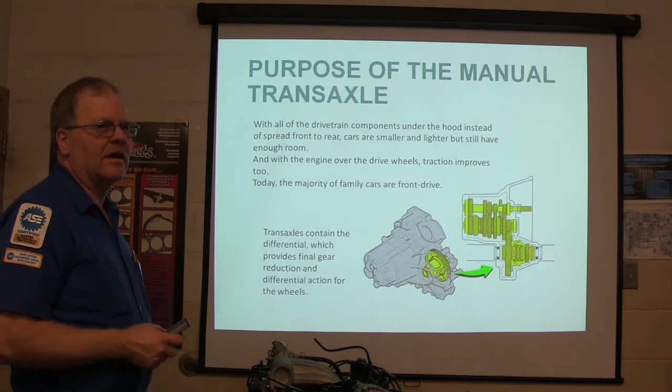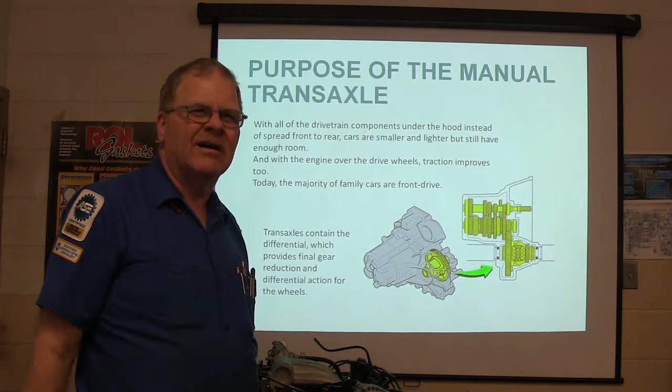You don't have to have a transmission tunnel if you've got front wheel drive, or if you've got everything in the back. If the engine's in the back or the transmission's in the front, you don't have to have a tunnel. Now most of them got a console anyway, but the majority of family cars are front wheel drive now.

They have the differential in them. We've been talking about that before. That's not really all that complicated.

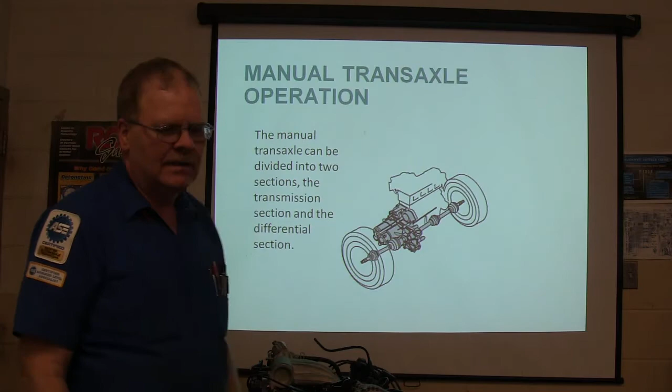Manual transaxle can be divided into two sections: you've got the transmission section, and then you've got the differential. That's why they call it a transaxle.

On the earlier front wheel drive ones, like Toronados and Eldorados that I used to work on, they actually had a little cast iron housing with the differential in it, and because the engine sat straight in those cars, not sideways, they had to do things a little differently. The Acura Vigor had the engine in straight, and the transmission looked like a regular transmission, except the output shaft, instead of going back to a drive shaft, came back out the front into a little differential assembly.

If you're ever taking one of those apart and putting it back in, you need to put a lot of grease around those splines where the transmission hooks into the differential, or it will wear out those splines. I've seen that happen.

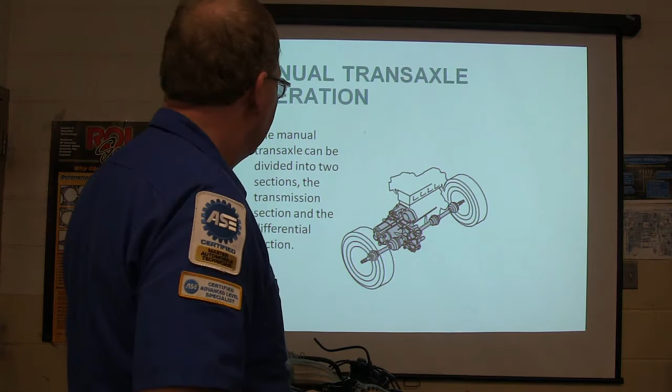The transmission section uses the same kind of components as a manual transmission - this is manual, not automatic. Shift fork, synchronizers, gears, basically the same design.

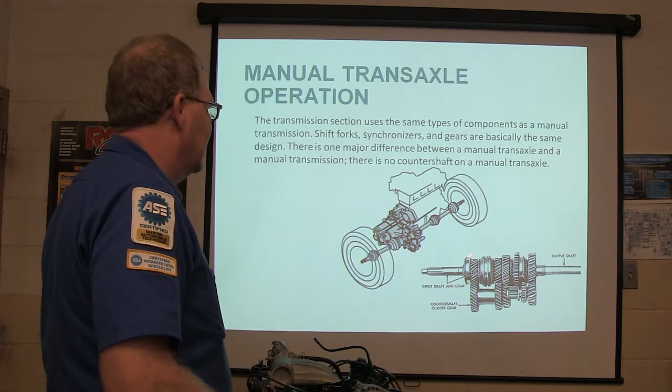There's one major difference: there's no counter shaft on a manual transaxle. This right here would be your standard, and then you've got a counter shaft down here on that other one. The counter shaft isn't necessary because rotation from the input shaft to the main shaft, called the output shaft, is transferred to the differential by way of the ring gear.

The ring gear is built right in here. Remember when I was talking about the automatic transmissions on the Toyota Camrys and stuff, you need to understand that - I don't know when that changed - but you need to make sure that if you're working on a 90s Toyota Camry, or even early 2000s, the differential part has a different oil chamber than the rest of the transmission.

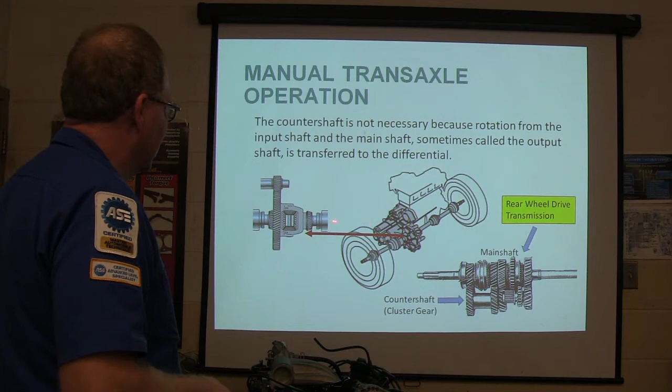If you don't check it, it could lock up going down the road, and that'd be nasty in traffic in Atlanta. Rear wheel drive transmissions like this have a main shaft and a counter shaft right there. This goes out to your CV axle, coming from the transmission itself. The differential is built in from the gears - this is the output of the manual transaxle, front wheel drive differential, going to your wheels.

And here's your rear wheel drive - it's set up going back here, and then it goes out to the wheels after it gets here.

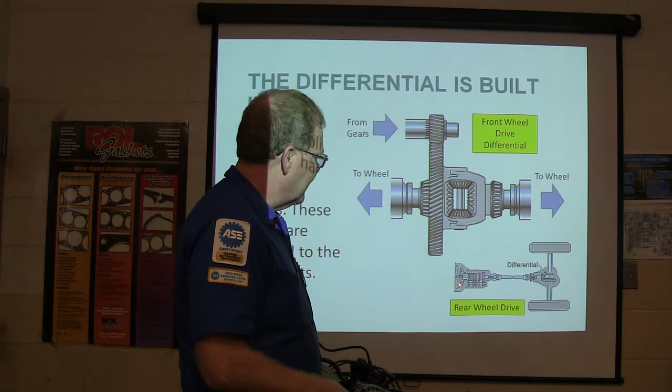They even have that drawn the right way. Looking at this, which way does this turn when you're going forward? If you're looking at the front of the engine, it turns clockwise, right? But if you're sitting in the car, it's turning counterclockwise because you're facing the other way.

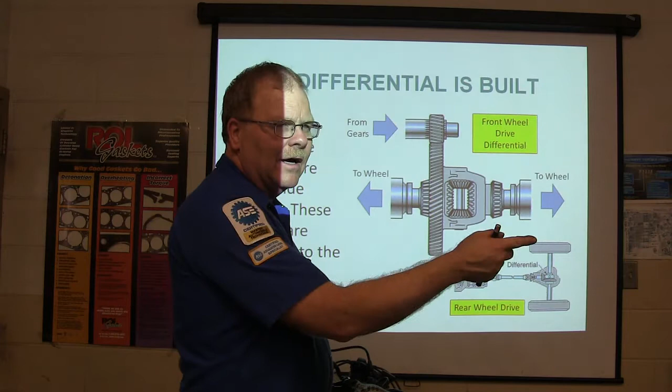That's what I'm always telling you guys about taking out brake caliper bolts - you got to turn the bolt the way you want it to go. If you want it to go away from you, you got to screw it away from you. But anyway, that's just a little aside.

The components that make up the differential are like this. We saw this a couple of days ago, didn't we? We didn't take them all the way apart, and that's what this right here is - that's a differential.

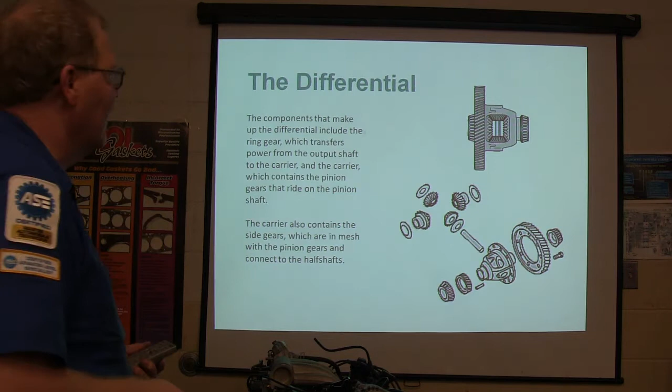I've held it up many a time. You can see that. And that actually came out of a front wheel drive. It's not very big. But you remember this right here, McBride, that pin that had to slide out so that we could push those axles in and take the C-clips off and get them out and all that? Well, on your front wheel drive, you got that little old spring ring that whenever you shove them in there, they click in. Then you got to pop them out, kind of like you had to pop them out on that car you're pulling the transmission out of.

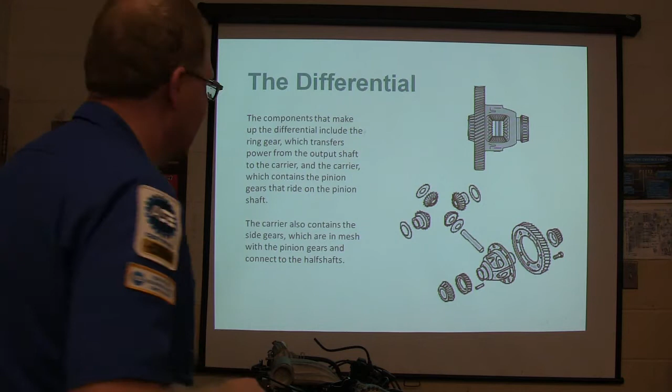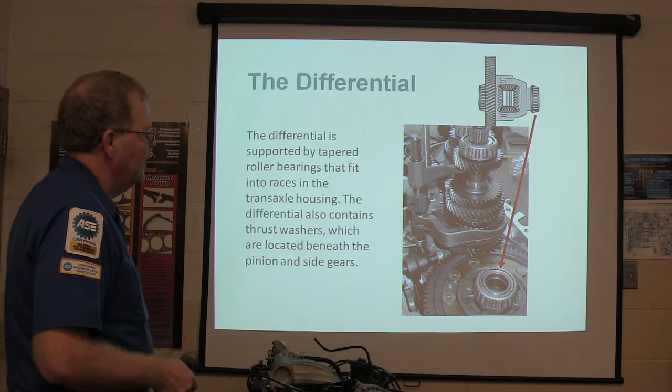The differential is supported by tapered roller bearings. That's what they look like. You've seen those before. Remember we packed some the other day on Gene's truck, right? The differential also has thrust washers that are located beneath the pinion and side gears. A lot of times, when you're putting these things back together, you're supposed to make sure that you get that preload right on those gears. And you would put shims between the center part of that bearing and that carrier to make it right. And there's a way you check it with depth micrometers and all that kind of stuff.

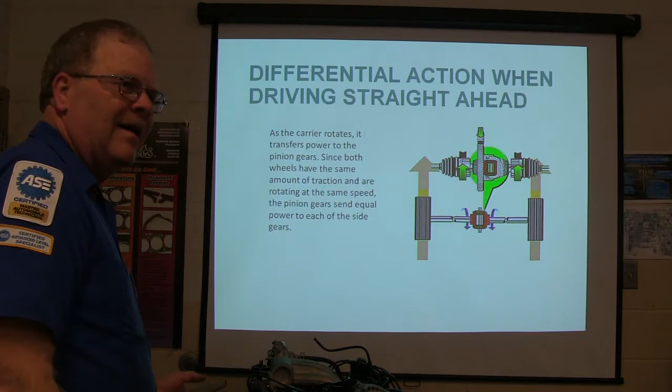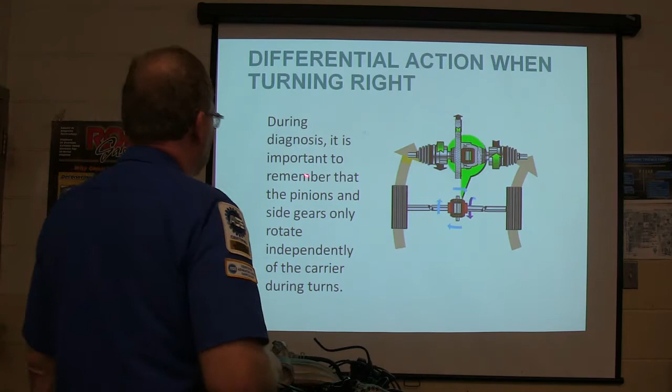Okay, differential action when driving straight ahead. They're just rolling. When you're driving straight ahead, it's just doing like this, and there's not any gear action at all. The gears don't start rolling against each other until you're turning, and that's the only time that happens. So one wheel can turn faster than the other? Yeah, that's right. That's necessary. Even those little remote control cars, if you tear the rear end apart on one of them, it's got those same kind of gears in it. It's really something. And during diagnosis, remember the pinion and the side gears rotate independently of the carrier during turns.

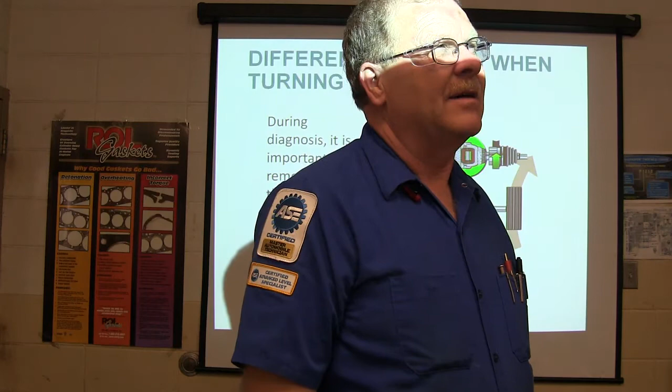One of the things I thought was peculiar about this rear wheel drive stuff is we had a Ford pickup in here, the 98 model, that had busted up the spider gears. We bought a set of spider gears, and it was $65 for a new set in those days. And they actually had positive traction. It had that spring in between the gears. It was a booger bear getting it in and out of there. But anyway, got all that done, built it back up. The oil cost almost as much as the gears because the oil was real expensive. But a Chevrolet, just like it, the gears cost $500 or $600. 10 times as much. And if you look at them, they don't look any different. I don't know how much they are for a Dodge. Cheaper.

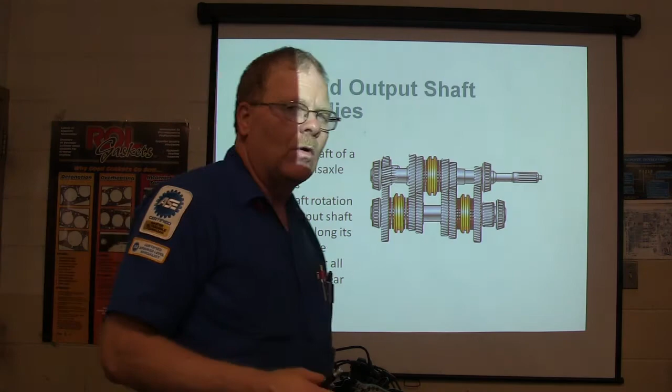Input and output shaft assemblies. The input shaft of a manual transaxle transfers crankshaft rotation. See, here's where your clutch goes. Now, most of the time, a transaxle won't have a pilot on the end. It'll just be sticking straight out there. Along its length, there's drive gears for all the different gear ratios. Now, you're going to notice that this synchronizer is on that shaft, and then you got two synchronizers on those two shafts. See that? They're not on the same shaft. This particular one here, because it's got fifth and reverse, has one back there behind the center housing. See them bearings? This type rides on the input shaft the same way the speed gears of a manual transmission ride on the output shaft.

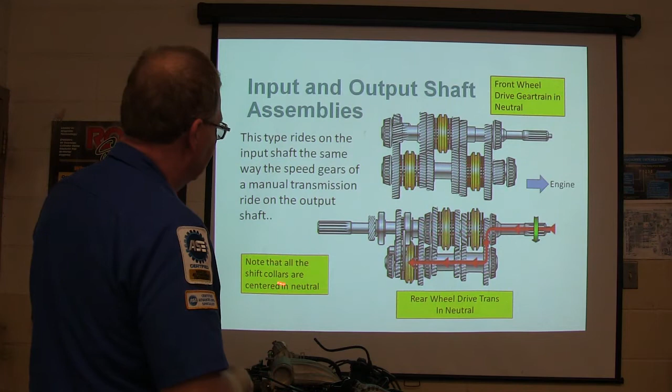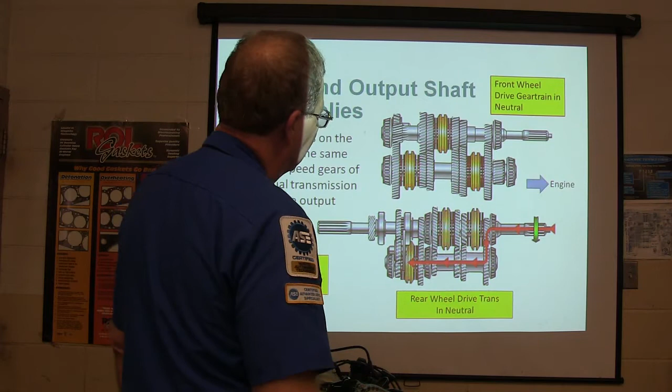All right, now, see this right here, your engine is here. This connects to the engine, not that. I put that arrow in a bad place. But we got all the shift collars centered in neutral right here, except that one. That's actually supposed to be in neutral. I don't think it is. Maybe it is. Hard to tell in a picture. But now this is in neutral, and that's in neutral. See how this is spinning all the time, but on this one here, you're just going straight through and nothing's being transmitted down this way, so everything's just sitting there.

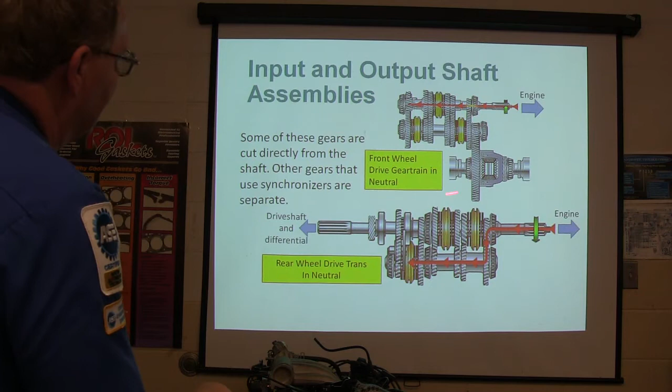All right, here's your input and output shaft assembly. Some of the gears are cut directly on the shaft. Others and the synchronizers are separate. Now, some of these gears, when you're taking it apart, you can just take a snap ring off and pull them off. Some of them will come off after you take other parts off. Some of them, you have to press off of there with a special tool. So it's just really different.

And Eddie was talking about some of those guys down there. And it's kind of like automatic transmissions up here. You know, I can get somebody started on an automatic transmission, and they'll tear it down, and then they'll start putting it back together. And if I don't actually set aside time for them to put it back together, they'll let it lay there and won't ever touch it again, if it's somebody that's not particularly dedicated. Of course, I know that you guys aren't that way, but I have had that.

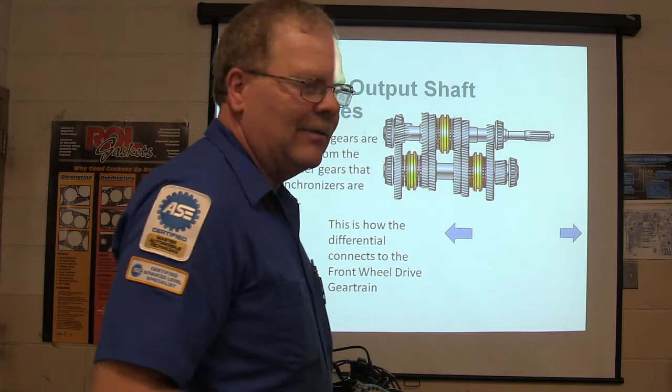Anyway, Eddie was saying you can explain how all this stuff works, but when they have to work really hard to get those gears off those shafts and everything, they cry and walk away. They just walk away. We don't like people crying and walking away around here, do we? It's not good. It's not for lazy wimps.

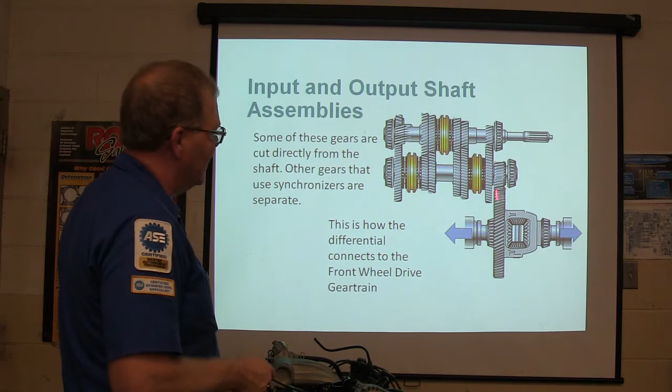Here's your differential. See how I put that in there? You know how hard it was to do that, to build that slide? Look here. To make that thing materialize. Ew. Like that. See? Pretty good stuff. You know, that was tough to make it do that.

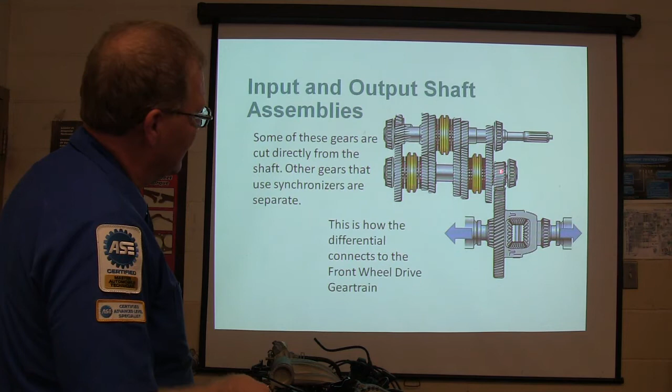But anyway, this is how the differential connects to the front wheel drive. See, it comes in from the engine, goes through whichever shafts are engaged. This right here is your ring gear, and that's your pinion gear. That's your ring gear. And then of course our other gears. All right, the input and output shaft assemblies.

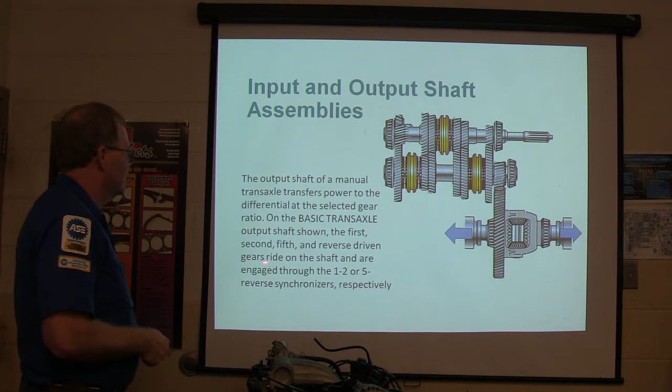A manual transmission transfers power to the differential through the selected gear on the basic transaxle output shaft. The first, second, fifth, and reverse gears ride on the shaft and are engaged through the 1-2, or 5-reverse synchronizers respectively. Now some of them have got a synchronized reverse. If reverse gear is a helical cut gear, it'll be synchronized. If it's a spur gear, it won't be.

That's why on some of these manual transmissions, when you're putting it in reverse, you gotta let off the clutch for a second, let it move those gears a little for them to drop in. Doesn't mean there's anything wrong with it. And you're gonna hear some gear rollover noise. People used to complain when they had a brand new pickup truck with a manual transmission; they didn't like the noise they'd hear when the engine was running. But you're gonna hear those gears moving in there, even if there's nothing wrong with it.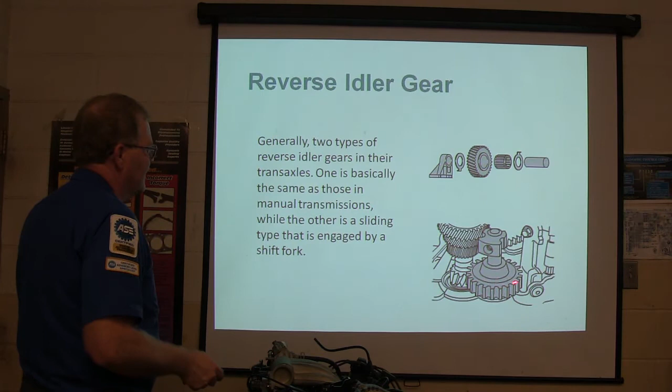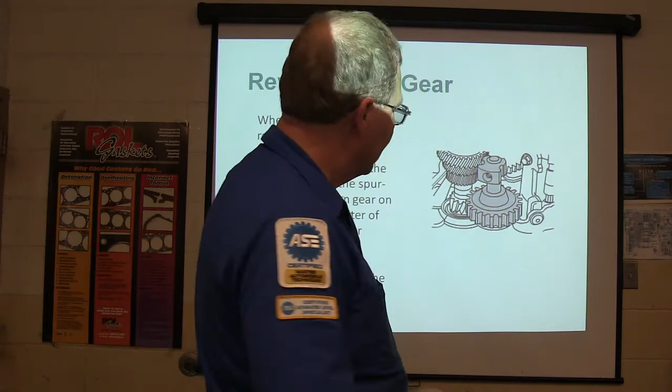Two types of reverse idler gears. That's the one that's synchronized because it's helical cut. And this one here's a spur, and it's basically not helical cut. It's a sliding type that's engaged by a fork. That's what that transaxle over there has got on it. When it's engaged, the reverse idler gear meshes between the spur cut gears, and basically the outside of the first gear synchronizer will have teeth on it, and the spur gear will mesh with those, adds another gear to the train, and it goes backwards. That's how that works. By adding that gear to the train, the output is reversed.

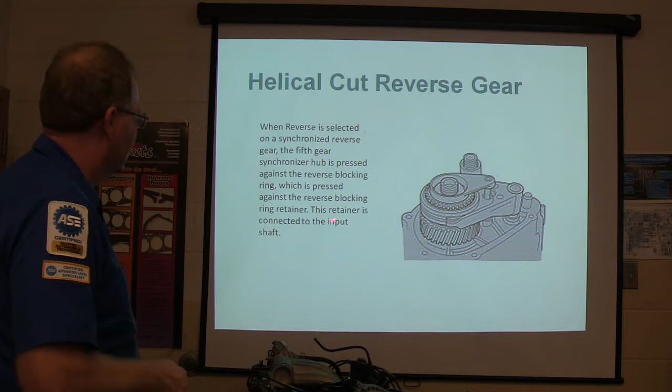So when reverse is selected, the synchronizer, that's a really good picture right there, is pressed against the reverse blocking ring. What the blocking ring does, it's cone shaped on the inside, and it's usually got some lines cut in there, kind of like a tread on a tire, or it may have a lining in there. And what it's designed to do is go against the cone on the synchronizer, and it actually makes the speed of that thing match the one that's going through there.

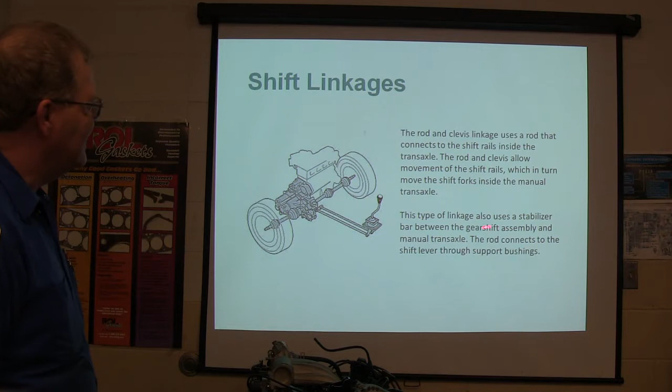All right, the rod and clevis linkage uses a rod that connects to the shift rails inside the transaxle. Sometimes you got shift linkages made like that. Most of the time it's not. It's cable driven most of the time, which is like this right here. And you might notice they'll have your cables color coded. You notice how they're white and black on there, so that you won't hook them up backwards.

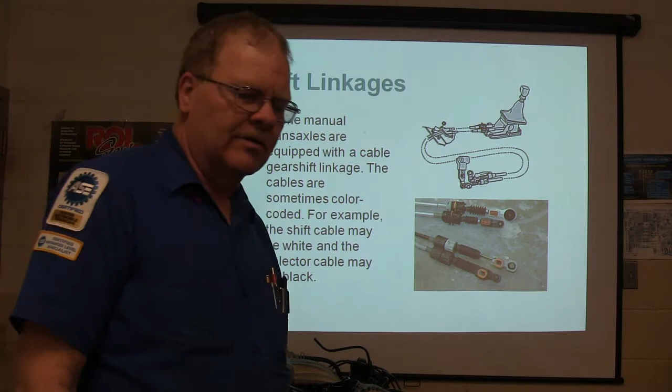Now it's really easy. One time we had a Toyota Corolla here that we used to pull the transmission out of and put it back in, and somebody messed up one of the shift cables hooking them up backwards or something, and the shift cable for that Toyota was $125 for a replacement. Shift cables aren't cheap, even for an automatic.

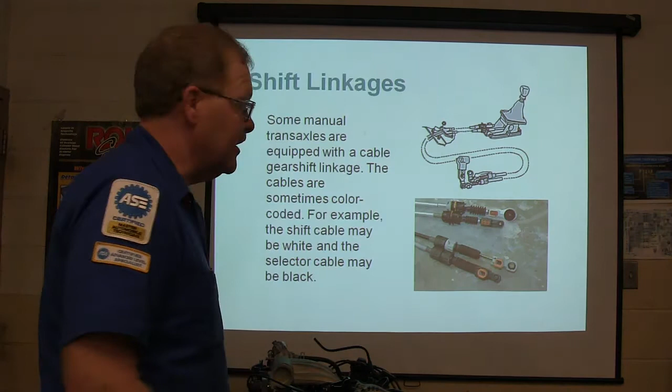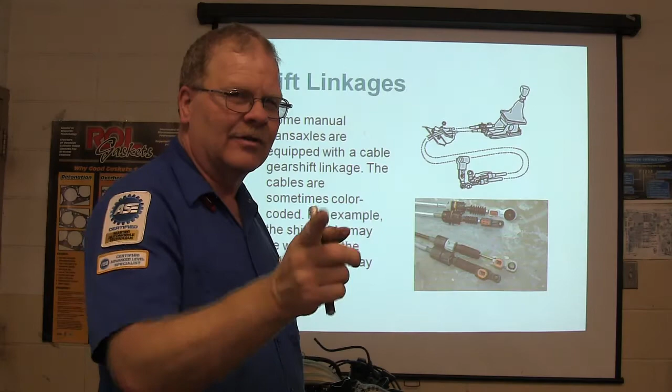With the shift cable, we see this: one's a shift cable, one's a selector cable. So the shift cable will be the one that actually puts it in the gears. The selector cable is the one that goes back and forth between your first, second, third, fourth, and fifth.

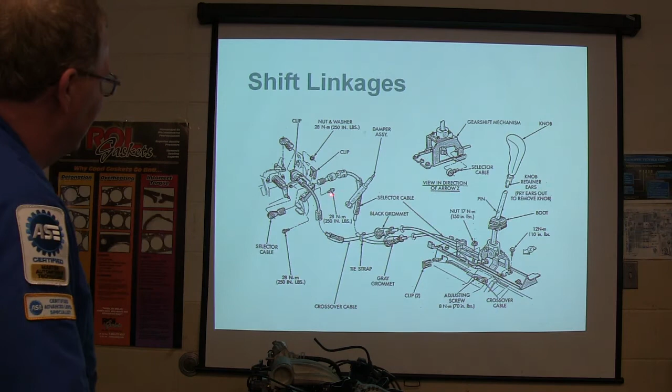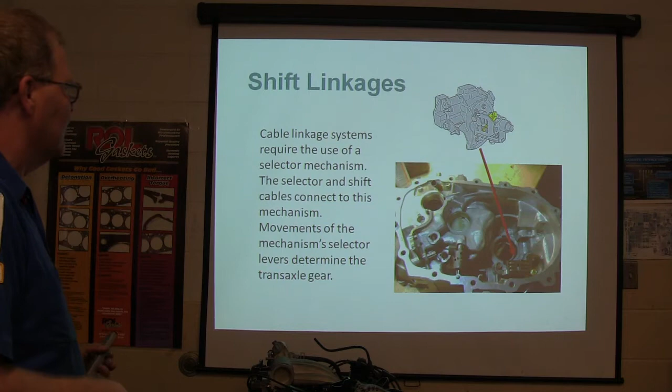See that? And then you got this stuff right here, the way it's hooked up. This is not as complicated as it looks, really. Shift linkages. Inside the transmission, there's this little part right here where you go in through your regular gears. You can kind of see that it vaguely looks like your gear shift pattern, and you can watch what that does. The most important thing is getting it to do this.

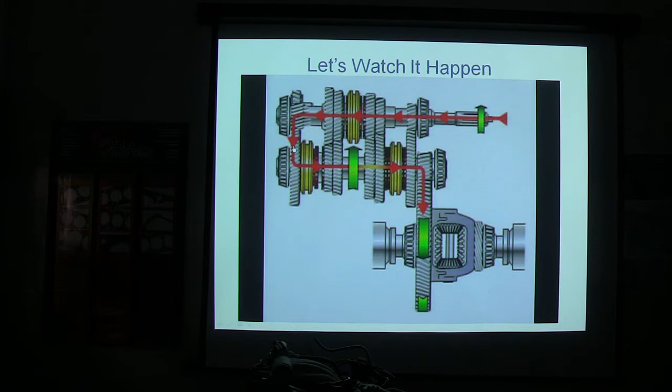Let's watch this happen. Watch. We're going to change gears now. All right, you see that? Watch again. See how it's happening? One more time. You see it again? Got that? One more time for the hub. Okay. You get it? I believe so. There you go. All right then.

What gear is that? Don't put anything on your paper yet. What gear is that? That's second. That's first. Okay. What about that one? Second. What about that? Third. Fourth. No, that's reverse. No, third and fourth would be their own, right? Fourth is straight lockup. Not on this one, you're thinking about a manual transmission.

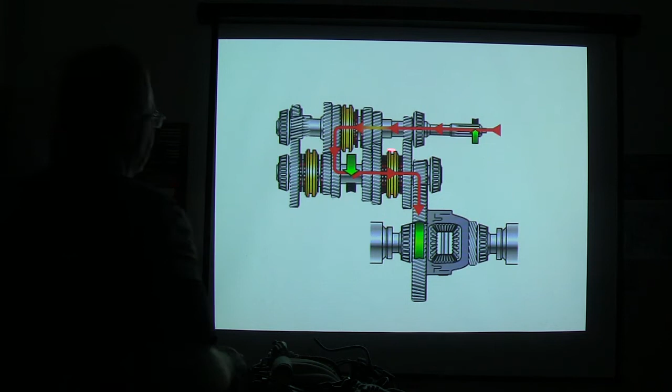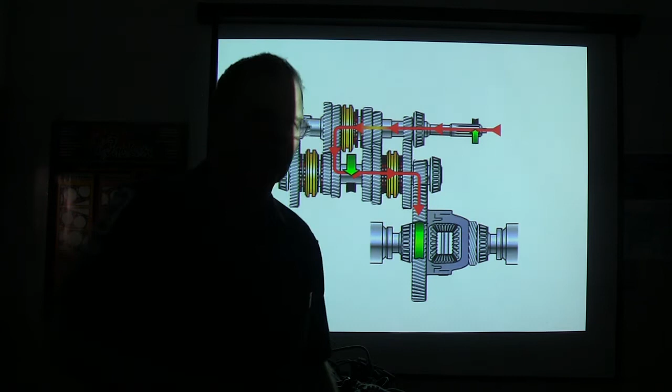Whenever you got fourth on one of these, this gear and that gear are the same size. But it's still got to go out here. How can you have straight lockup from here to here? Well, you can't, never mind. I got confused. You're right. All right. See this? So what is that?

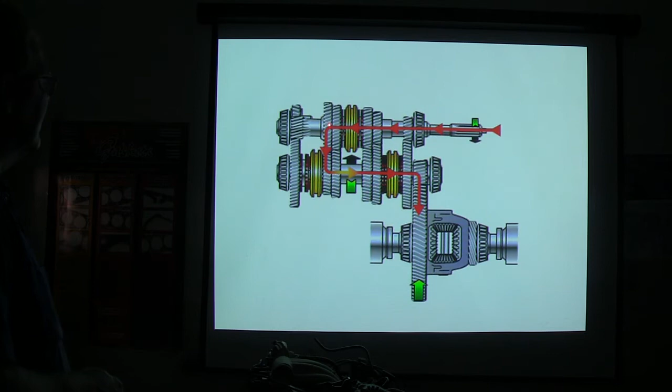That was fourth, because you notice how you're starting out with a little gear pulling a big gear, and that's going to be your first. And then you got a slightly bigger gear pulling a slightly smaller gear, and that's your second. And then a slightly bigger gear pulling a slightly smaller gear there. And finally, both the gears are the same size. And then you've got a bigger gear pulling a smaller gear, and that's your fifth gear. And then there's your reverse, because you notice that this is going backwards now.

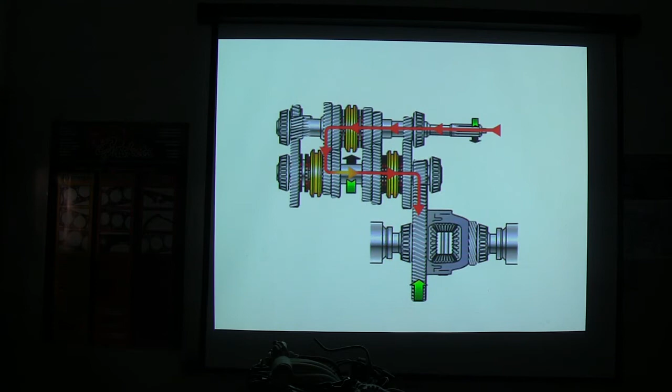Let me back up. Look at the direction the arrow's going, see? See that? First, second, third, fourth, fifth, reverse. Fifth, fourth, third, second, first. Neutral. First, second, third, fourth, fifth, reverse. You getting it? Isn't one synchronizer a 1-2 synchronizer, first and second gear, and a 3-4 synchronizer? Exactly. There you go. Now let's mix up the gears and see what you know.

But we're gonna turn on the light. Did you start writing already? No, not yet. Did you put your name on there? Yeah. Well, that's a good thing. All right. Which gear is this? Don't say it out loud, just write it down.

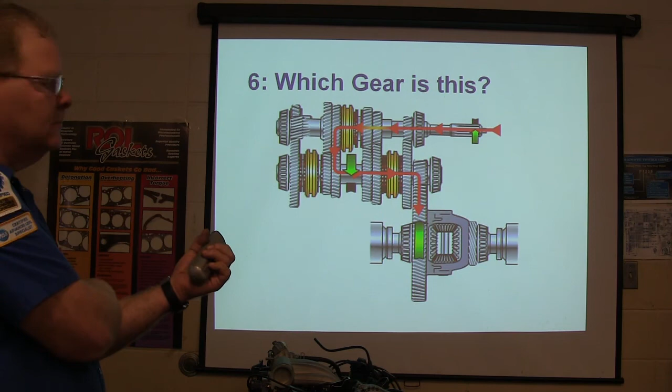Which gear is this? Which gear is that? What's that? They're not in order, they're mixed up. What's that? Make sure you hide your paper. Which gear is that? Which gear is that?

That's the easiest test I've ever done. Go to that second one real quick. The second question? No, seriously. That's the easiest quiz I ever took. You're good. My bad. Finally, I get 100. I mean, this is the easiest quiz, I learned all this last semester.

Well, you remember how you were beating your head against the wall last semester and absolutely could not get it. I did beat my head against the wall. Yeah, but the thing about it is I keep refining this to make it simpler. That's what you're supposed to do, make it simple so people can learn it, turning it into a skeleton.

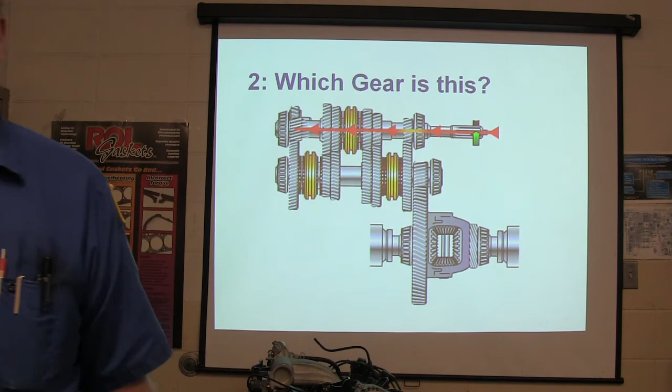Trade papers, let's see how you did. We got time. Nick copied off and got the same answers. Let's hope they're not wrong. I did notice there were times whenever two buddies would be sitting next to each other, they would miss all the same questions. All right, let's see this.

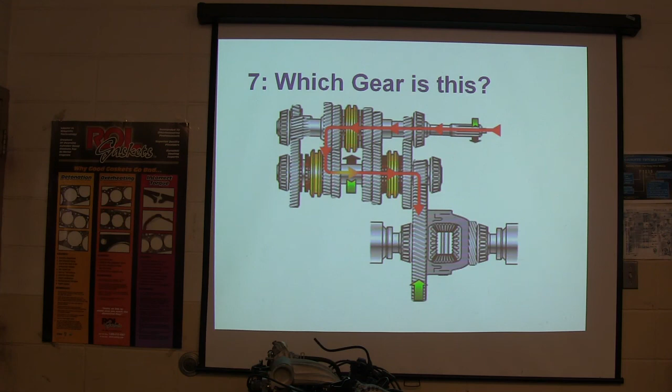What's that? First. Neutral. Third. Reverse. Second. Fourth. Fifth. Very good. You got it, huh? Everybody got 100. Don't you just like that? Ain't that wonderful? Well, I'm sure Nicholas is happy. There you go. That's it. They know these.